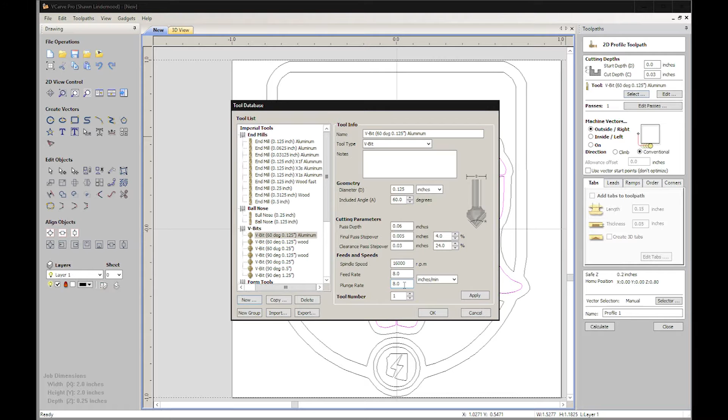And now I can address cutting the vectors out. So in this case, I'm going to grab my tool path on the outside. It's already selected. We're going to grab a V-bit. A 60-degree included angle, which means the entire angle of this is 60 degrees. Now these are all specific to my machine. Some of these don't matter, like spindle speed. It doesn't control spindle speed, so it doesn't matter. But we're going to select that.

We'll call this the Deathclaw, because that's the part that it is including. We're not adding any tabs in this because we're not cutting something out. We're just going to go through. This is more like a detail cut. So if I did it right, that should cover what I wanted to cover. If I did it wrong, it's the opposite, because the change is the difference between an inside and outside cut.

Voila. And actually that is exactly what I was hoping for. So what I can do is actually do that with all of this. I'm going to actually redo it. And now I'm dragging left, and everything that's partially selected is going to get selected. And we can preview that toolpath. So it's the same thing with the head, but then it includes the outline.

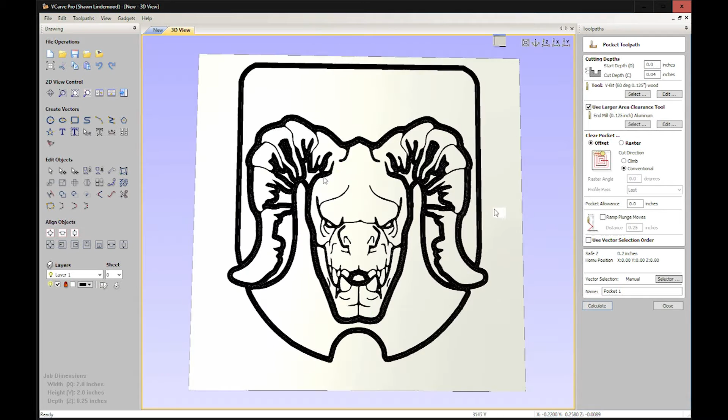Now this is a detail cut, so now we can go in and do what's called a pocket cut. And in the pocket cut, we're going to be clearing away all of the material that isn't wanted. In this case, it's going to be everything in here that we're not going to want to see. Anything that's considered waste material that we don't want.

See, we have the same stuff calculated, and I know I selected it wrong, because that is clearly not what I want cleared. So the correct selections, what it considers inside and out, is clearly not what I was wanting inside and out. Now we are seeing that. That is where it would cut out. But we actually don't want that. We want the opposite. We want this inside here.

And my mistake was not selecting this outer shell here. So what it considered inside was everything inside this loop. What I want is everything inside this loop that's not part of these vectors. So if I was to just select everything. We're going to deal with that in a moment. That's the Arizona logo down at the bottom with a nice little lightning bolt going through it.

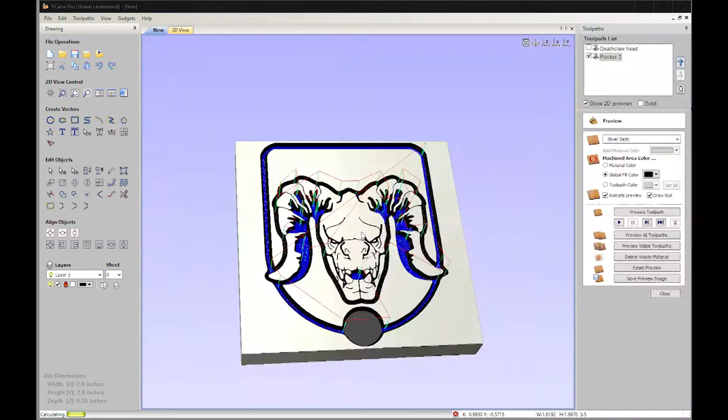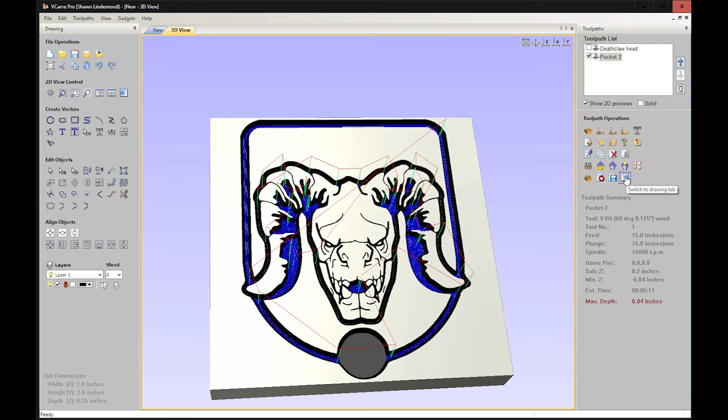All right, so we're selecting everything here. We'll select that and see if that's going to be calculated correctly. We're using a V-bit for the tool, the specific clearance cuts, and then the 1/8 inch bit for the larger stuff. We're going to 0.04 inches. Because it doesn't need that. That's why. Okay, so let's do that.

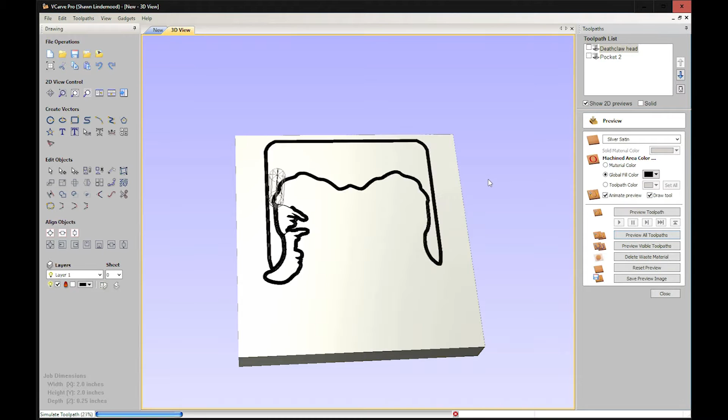We'll go to preview toolpaths, reset the preview, and we're looking at all of the cuts. And actually the Deathclaw head, we will go back and select the circle. Let's calculate that and preview all the toolpaths again. And that gets wiped out like that. But really what we need is some sort of clearance on the outer edge here to make that flat.

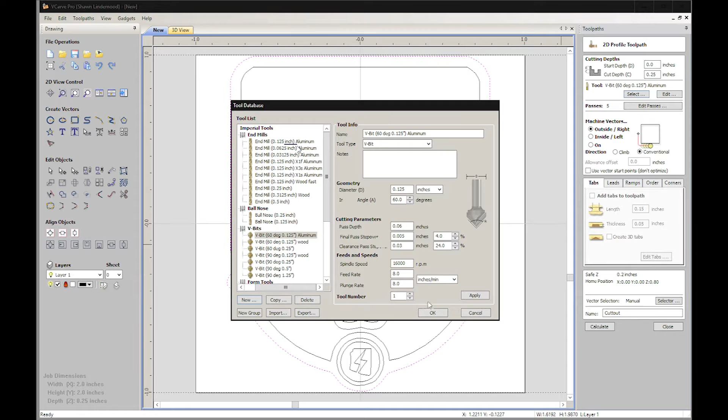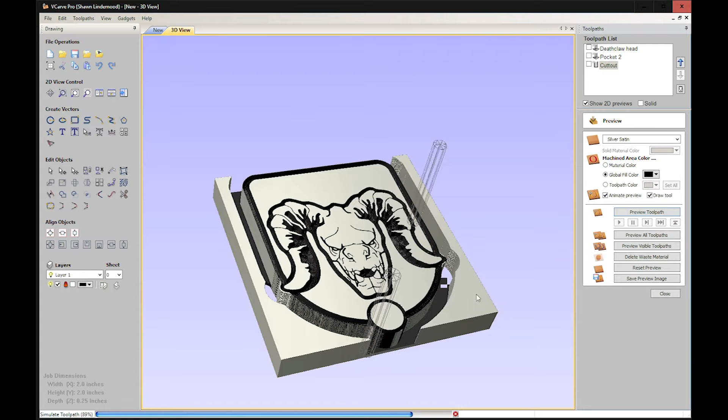Because when I go to cut this out, and I'll show you what we'll do there, we'll go to a profile to cut through. We're using a 1/8 inch drill bit or end mill to cut through 1/4 inch worth of material. On the outside, calculate that. And so this would be the cutout. So what you're going to see here is actually a lip that goes up. So this is not the desirable setting that I want.

Let that finish. We can delete waste material to kind of show what's going on here. And what I want actually is this needs to be flat. Or we can go the opposite direction and make this edge raised. However, what I want to do is offset the vectors inward by half of that width.

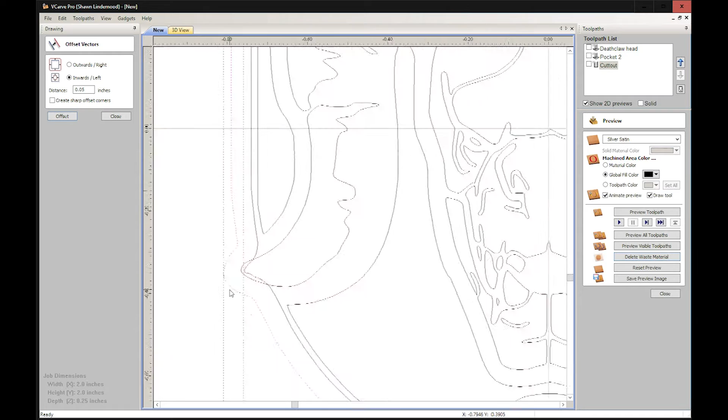How do we measure that? Oh, actually, they have a measurement tool. From there to there. 0.05. So we're going to use 0.05 inward. Oh, it's because I didn't select any. Offset that. That is not what I want. All right, Control Z that bad boy.

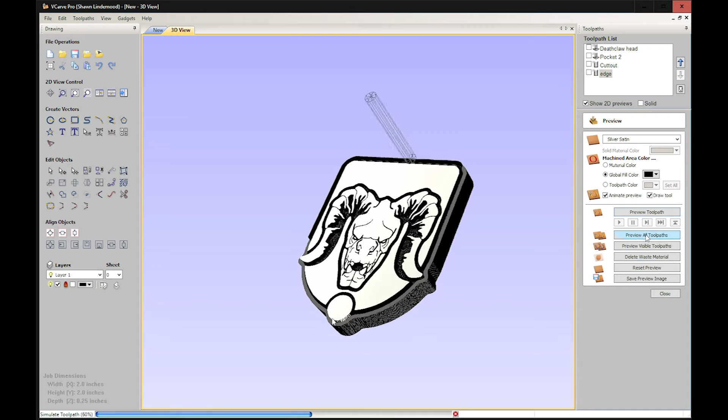Let's see if 0.04. So we're going around this. That actually should work plenty good and look fine at the scale we're doing. So what we're going to end up doing is something along the lines of this cutout. So what I'm going to do is copy this cutout. Actually only go 0.04 inches. Select that. And we're going to make sure we're on the outside of that.

Okay, we'll just call that an edge. Calculate that. And I believe that is going to be cutting out the bottom of that. That is not what I wanted. But for the sake of instructional purposes, we're going to say that is going to be sufficient for the moment. Because of that. So what I can do.

Oh, wow. Copy that. Go back to. And add these together like that, and it goes around it beautifully. And if we use vectors here, well, what we can do is just delete a couple of these bad boys. Call that sufficient.

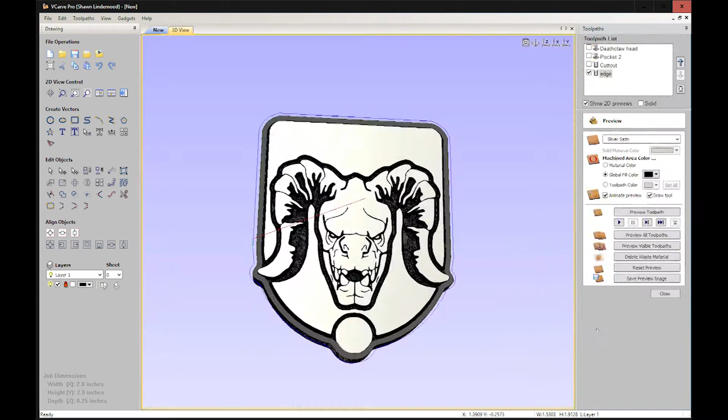Okay, I'm not hitting D on this, I'm actually converting them to something else. Okay, let's get these a little more. So on the scale we're looking at some really small measurements here. You can see we're going 10,000ths of an inch, like right here. As far as this is concerned, that's going to be very, very good. So we don't want to spend too much time on that.

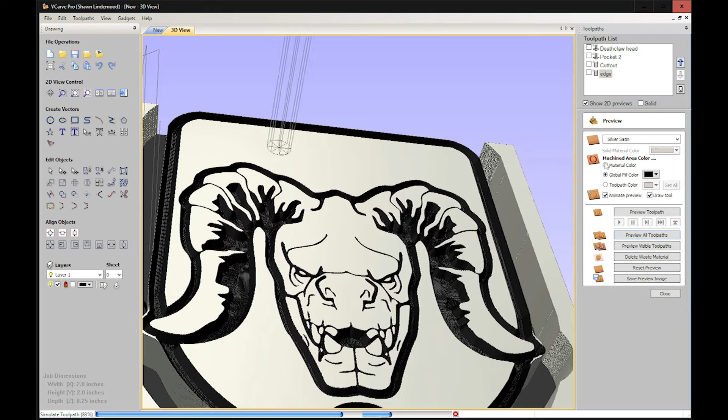And what I'm going to do is I'm actually going to recalculate that. And it shows the path there. I'm going to go ahead and reset the preview and preview all tool paths. And it's going to come close to the, well, that's the cutout. And then, okay, so it's doing it in order. I did this edge after the cutout, which is not something you normally do. Normally you do everything, then the cutout.

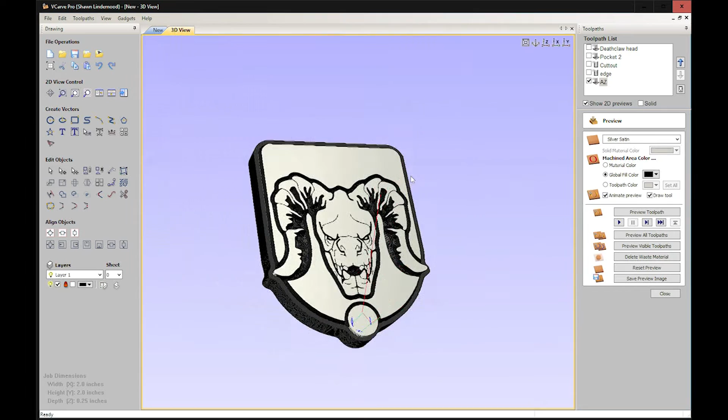That is how I'm looking at it. We now want to cut out the Arizona. What we're going to do is we're going to actually do the Arizona like this with another pocket. We'll call that Arizona. And it's not using the flat tool, so it says, hey, wait a minute. And so as a clearance tool, it just did the clearance parts. So if we preview that tool path, what we're looking at is like, what the heck, what's going on here?

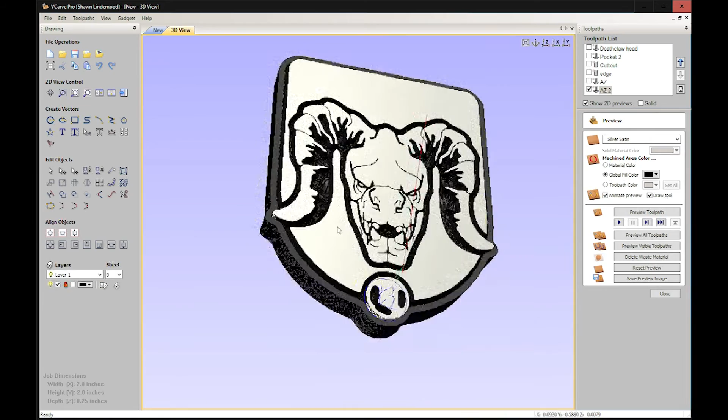So what we really need to do is also do a profile, tool profile, regular cutout. So we're going to go to another V-bit. I'm selecting tools based on their size, not the speeds. So I have aluminum and wood profiles, depending on whether or not I'm using big cuts for wood or little cuts for aluminum. And that's not going to matter for purposes of demonstration.

So that generated the details, and I think that I clearly selected something a little too much. So let's go ahead and preview that. Preview visible toolpath. So that chamfered the line right there. That is not what I was looking for. So I'm going to go back and look at what I did. I should have done the inside instead of the outside. So recalculate that.

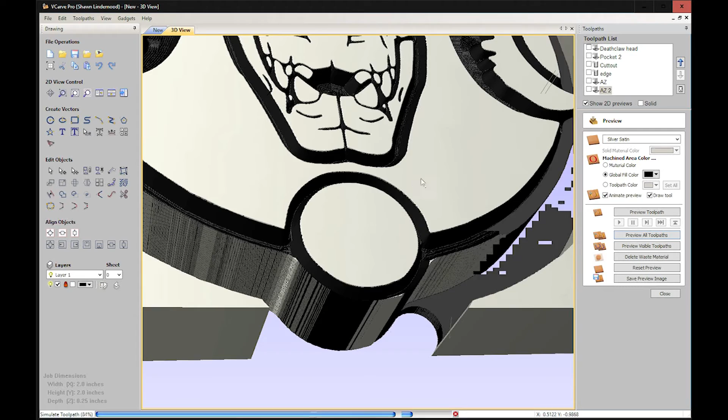And you can see if I went ahead and previewed that toolpath, it's going to cut out the opposite, and now I'm going to have these little raised lines where this groove goes, which is actually kind of a cool effect, but not what I'm going for. And in practice, when I'm doing something this small, with my setup, it ends up being a little too sharp, and not something that actually works out well. So we're going to go ahead and reset the preview and preview all toolpaths again.

Oh, we could totally edit this part out.

You see we got a really nice little Arizona going on. Delete the waste material. And real nice. Now, the one thing that's missing here is the New Arizona Republic across the top in text. So what I could do is actually go to text and just type something. Call that good. And just place it.

Or I could try to be more true to the bitmap and actually attempt to be a little more true to form. So we're centering that, and actually we're also going to be doing... yeah, so that's not the font we expected it to be. Boop.

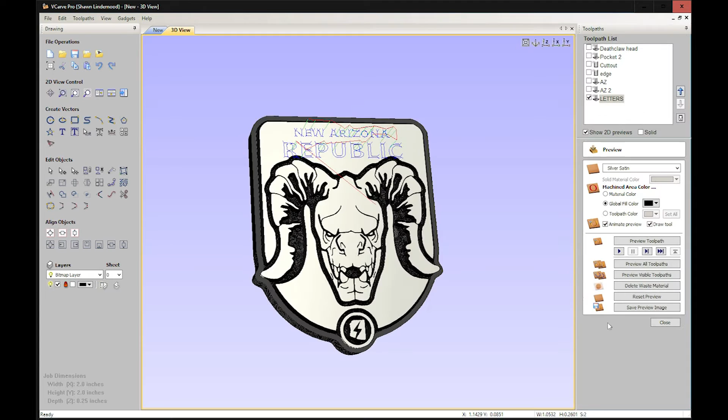So I'm going to go to the bitmap layer and get rid of the bitmap again. I'm going to select these two, and since I'm going to keep them the same, I'm going to go ahead and group them. And then we're going to end up doing an inside cut. It's going to inside cut with a V-bit. And we're going to go to 20 thousandths.

Preview that toolpath, and actually also should have done this, which is pocketing. We never use the larger tool. Sounds great. Preview that toolpath. Voila.

So at this point, I can actually export it for cutting, but there's a couple things I need to clean up here. I went through and I made sure all of these were the aluminum V-bit, and you see these two tools right here. These are actually the regular end mills. This cutout's got to be last. And what I need to do is actually go in and we're going to re-highlight it. So it's going to cut out there. I'm actually going to add some tabs.

We're going to reselect the cutout, then we're going to add tabs. So we're going to click on this to add the tabs, and we need to edit the tabs. So here we can actually do it by hand. What I like to do is keep them away from curves if I can. So I'm going to put one there, and then I'll do the opposite side.

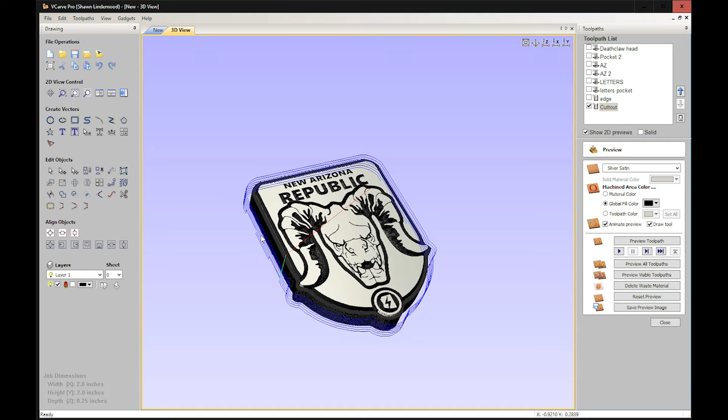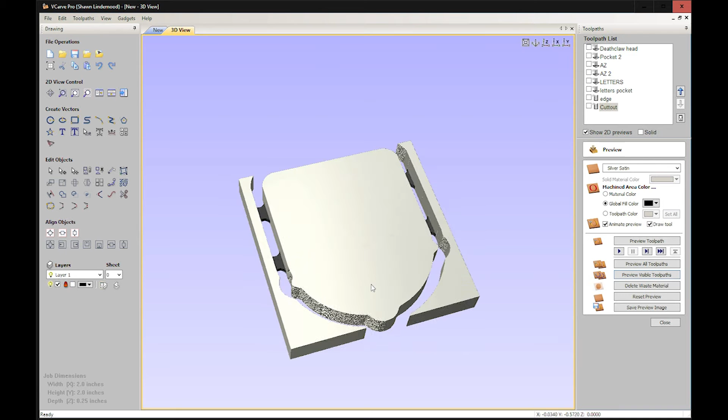As it's cutting it out, these are going to hold it in place from vibrating around, because I'm going to cut through at this point. So we're going to go with that. We're going to calculate it. It's going to recalculate the cutout, but with these little notches here, which are going to leave material. And if we reset the preview and just show that path, you can see this is how I like my machine cutting it out.

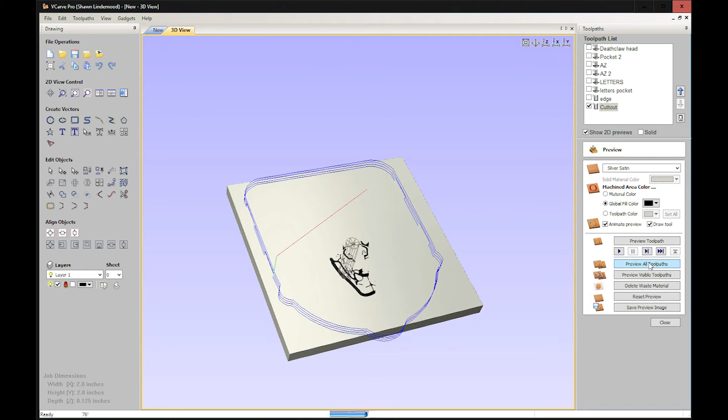So I can take this off and take it to the bandsaw and cut these out neatly, or with some diagonal cutters. And you can see the material left there to hold it in place, to not vibrate. I am not going to go that deep either, because my material is not that deep. This was for a wood cutout, so we're going to change that, and it's going to tell me you need to redo everything. Yes, I need to redo everything. We're going to change everything to appropriate thickness for 1/8 material.

We'll preview everything. Now, this is the order it's going to be cutting out in. All these are going to be the V-bit first, and then it's going to go around the outside with the 1/8" end mill, and then cut it out with that same 1/8" end mill. And that was the edging, and now it's the cutout. And that's ready to go.

So I'm going to go in and add words down here. Phoenix Outpost was decided to be Fallout group. There's a couple ways I can do that that will come up with the same effect as this curve right here. So if you remember, I have this section right here, and I'm going to pull those up, make those visible, and we'll go into node editing. What I'm going to do here is actually cut these at this point and free up and make a line. What that allows me to do is this is going to be my reference line,

because once I get out of that mode, the line remains, and I can use that as a reference line for text. So I'm going to do this side on camera, and then do the other side and line everything up just right. I'll do that in all caps. Fallout. Apply that. Figure out where that went. I don't know why I did the 3-inch height.

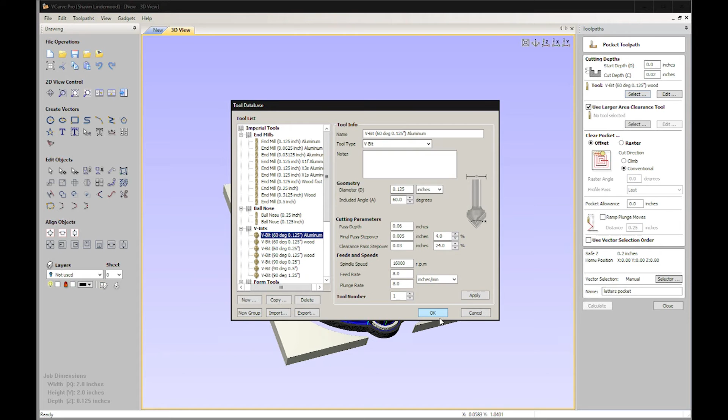And let me finish that up and I will show you how I export it to my card. So at this point we're going to select all of the same tool, so they can be exported as a toolpath using the same tool. It's going to list here all of these, and then this one right here is going to be a big no-no because my wood calculations are a lot faster, so I got to go back in there and change that from a wood to an aluminum bit, because the toolpath speeds are going to be slowed down quite a bit.

It doesn't need that larger tool. We're going to recalculate that, and then we're going to go back to save the toolpaths. So we're going to save all of these, all the ones that are visible, as a toolpath. You can name it whatever you can think of. I like naming it whatever it is, and then VBit.

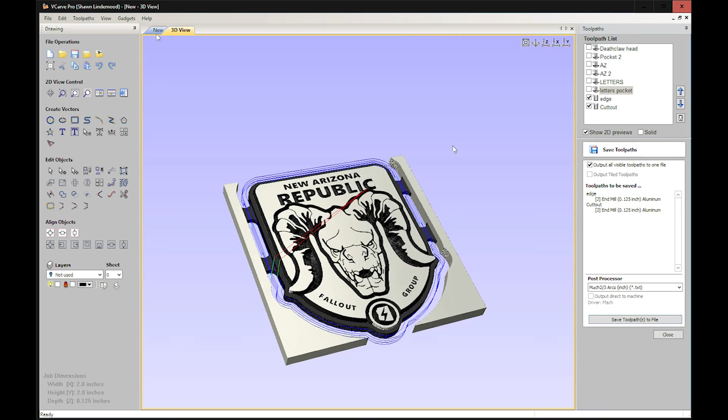So I remember it's a V-bit, and that's going to be that set of paths. So I can run that as one, and then I'm going to end up running the 1/8" end mill separately as a separate toolpath. Call that cutout. We'll save that. Now that those are saved like that, I can take that to my machine and cut them. And it will hopefully look just about like what we have in the picture.

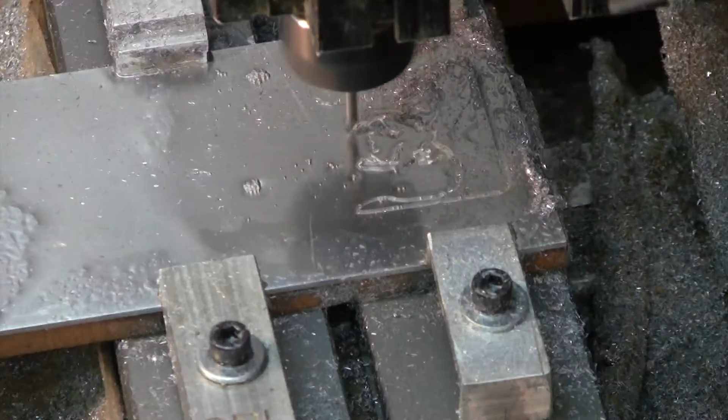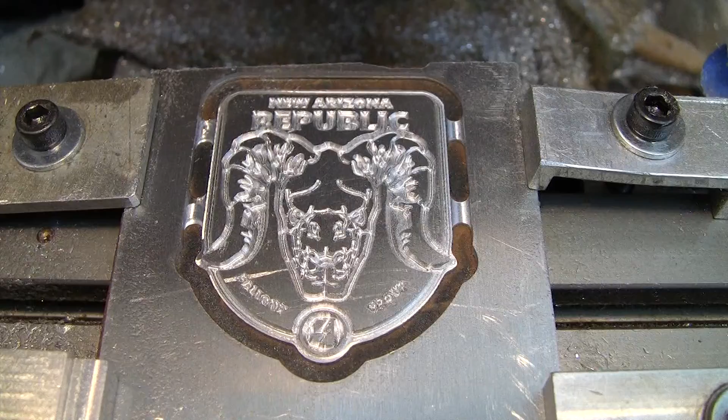This is a Taig micro mill. This is made locally, and it's only designed for a work area of 6 by 4 inches by 4 inches. So it's really ideal for the stuff I do. This is the 60-degree V-bit right here. This is what's going to be making the inside edges sharp and the grooves that we're going to be cutting everything out with. This is my Mach 3 CNC software that I've been using for a few years now, and I've got the code already loaded right there with the cut paths, and we are ready to cut.

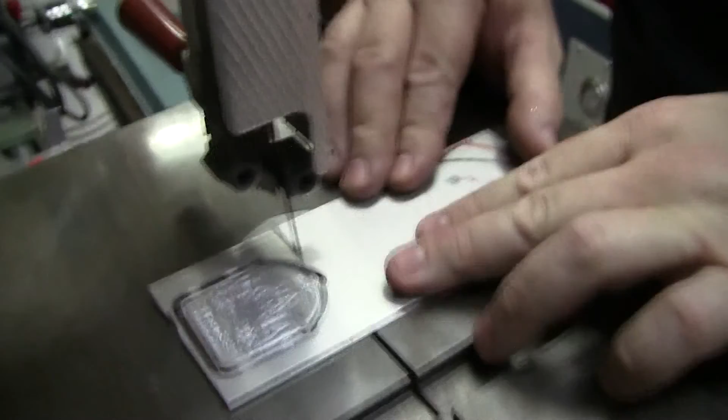Now here I'm going to get as close to the badge as I can without cutting into it, so that those tabs can still be there, but we can cut them off and file them off. I'm using a file called a Mill Bastard on these, and what it's going to do is give a good finish edge without having to worry too much about digging into it with some real coarse teeth. There's a nice clean edge there now. And I'm going to wash this down with some acetone, and then we'll apply some black.